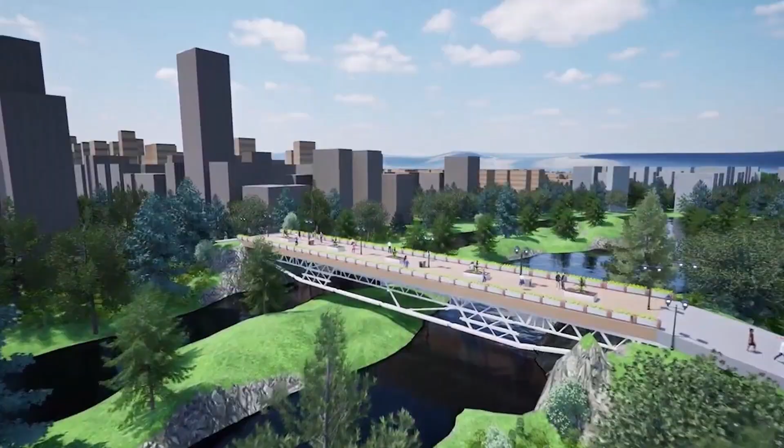To strengthen the integration of the population with the natural world, a steel bridge is proposed to be built spanning the Red River to connect the trails between the Forks and St. Boniface areas. Steel is chosen as the primary material due to its strength, stability, versatility, and commitments to sustainable practices. Furthermore, an aesthetically pleasing bridge design would help preserve the natural and scenic beauty of the Forks and St.

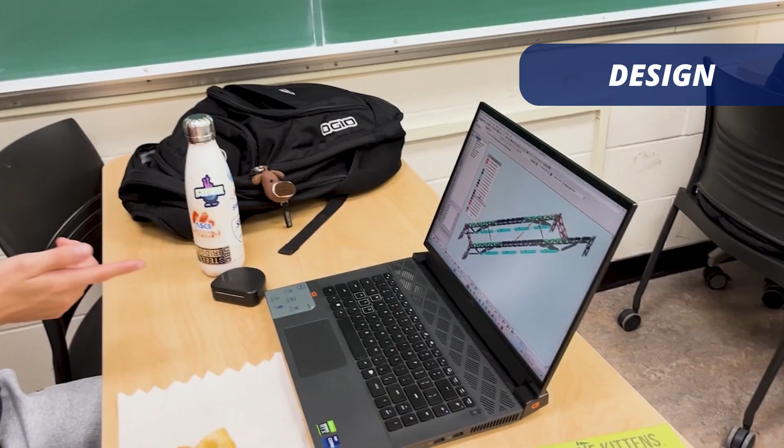Boniface trails. We developed a 1:10 scale model bridge consisting of 38 members and weighing approximately 190 pounds, with an aggregate deflection of 1 inch under a 2,500 pound dead load. Our design embodies efficiency and sustainability through minimizing material usage and optimizing constructability. Through Altair Inspire, we iterated under-truss and over-truss topology models that optimize material usage and placement. Ultimately, an under-truss design was identified to be more constructible and economically feasible.

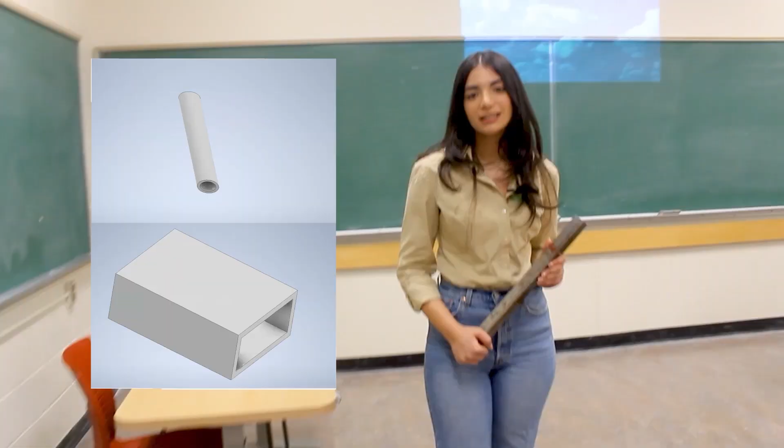Due to the piers being asymmetric this year, the optimal model that we selected involves strong lateral members and a wide bottom chord plate that we implemented in our final design. HSS and tube sections were selected as our members due to their ideal lightness to capacity ratio. S-Frame is used to design and iterate a virtual bridge frame.

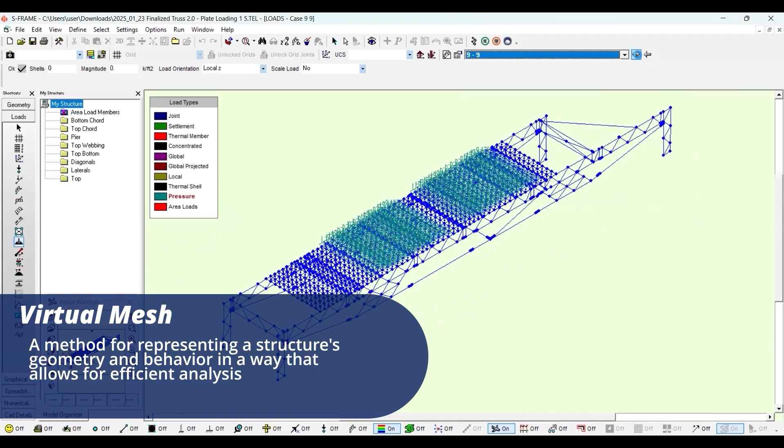Regularly, loads are split and distributed equally across both spans. However, due to the asymmetric requirements, we simulated plate loading using a virtual mesh. This approach accurately distributed loads based on the differing stiffness of the spans. Accurate analysis allowed us to optimize material use in the shorter span, reducing weight and enhancing sustainability.

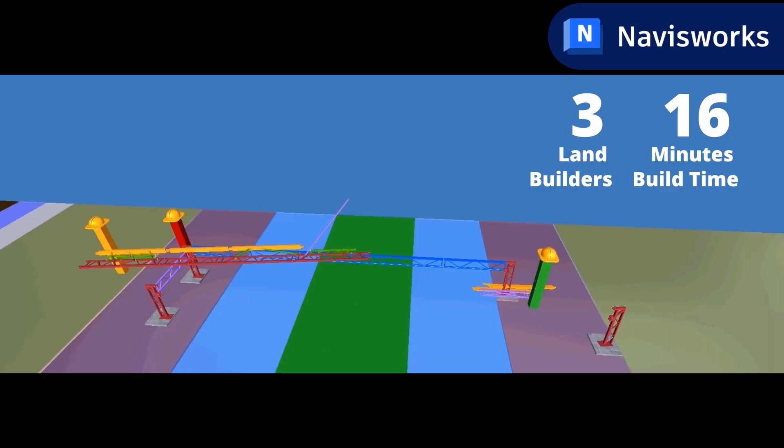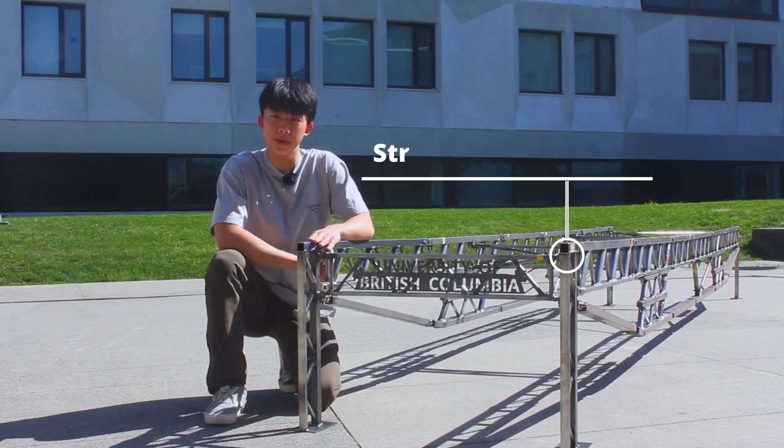This year, with the establishment of the construction subteam, constructability was a major focus in the design of our bridge. Through practice, our construction leads discovered that removing barges will be an effective way to improve construction economy. After careful consideration, a three-builder bargeless layout was selected, with a construction time of 16 minutes. As a result, DNA's finalized design included features that will benefit our builders during the construction phase. For instance, we strengthened our piers to function as a workbench during timed construction. This feature allows for bridge support while our builders assemble other parts of the bridge together.

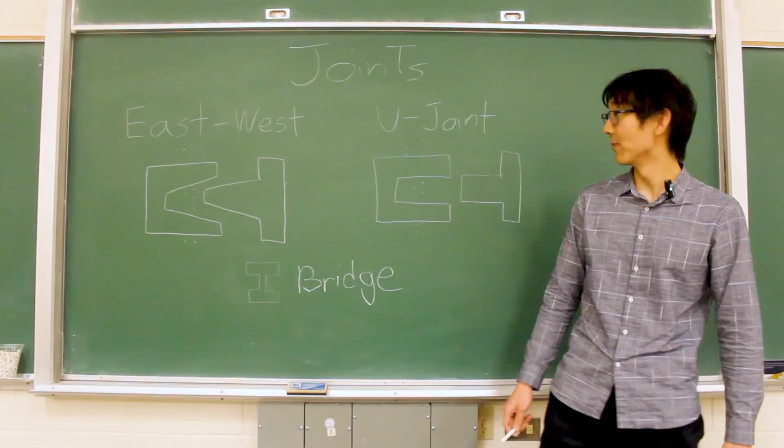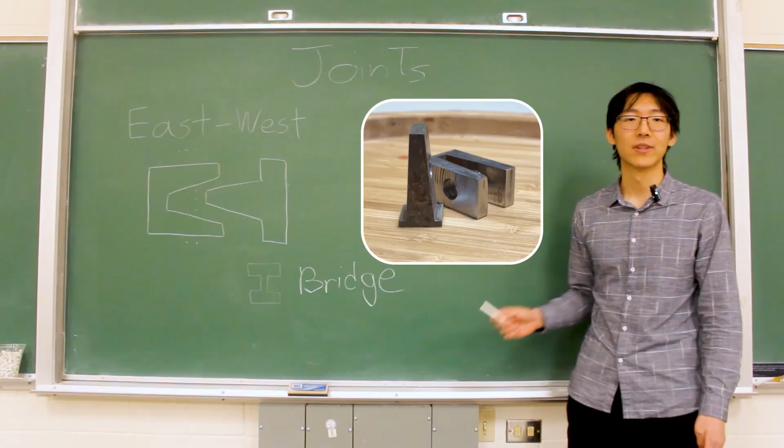Our connection designs balance strength and constructability by using 4 primary joint types. The east-west joints are used for connections in compression. It features a taper at the teeth of the connection that provides rotational and bearing resistance. The U-joint is similar to the east-west joints, but it doesn't have the taper. This joint is used for tension members. The plate joints were used for our 2D diagonals in order to add frictional resistance. And finally, our L joints are light capacity joints used for lateral connections.

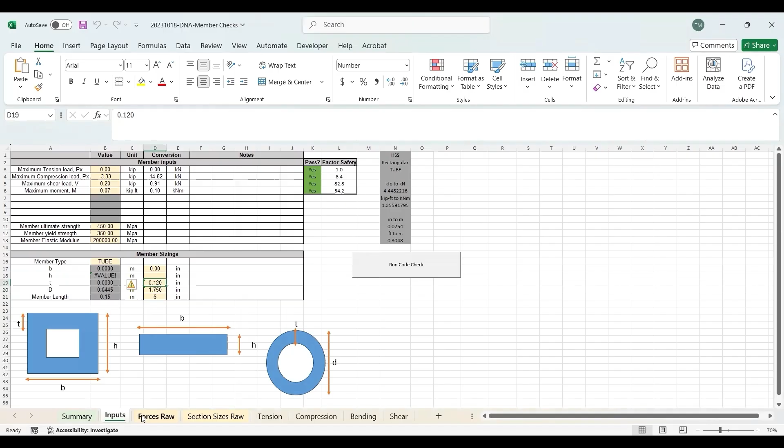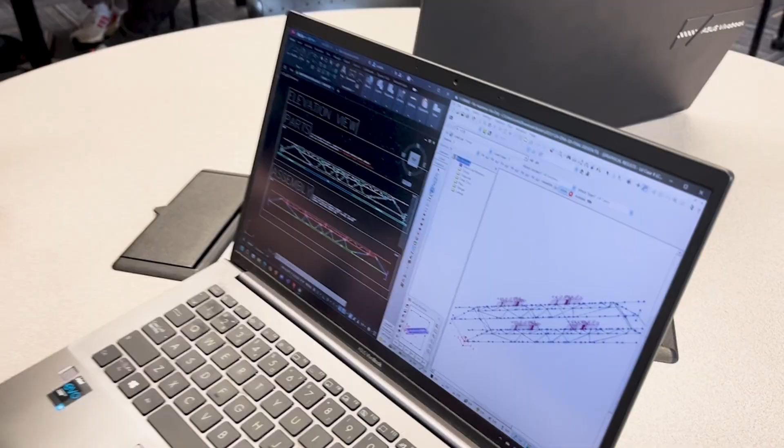Using Python, our DNA members developed an application that outputs the ideal joint sizing for every connection. This code expedited the calculation processes, allowing for more possibilities to be considered. Additionally, an Excel macro script matched section sizes to individual members and provided a corresponding capacity to demand ratio. Using these results, the S-Frame model is iterated and refined to optimize stiffness. Finally, spot checks are run with hand calculations to verify accuracy and ensure compliance with design standards.

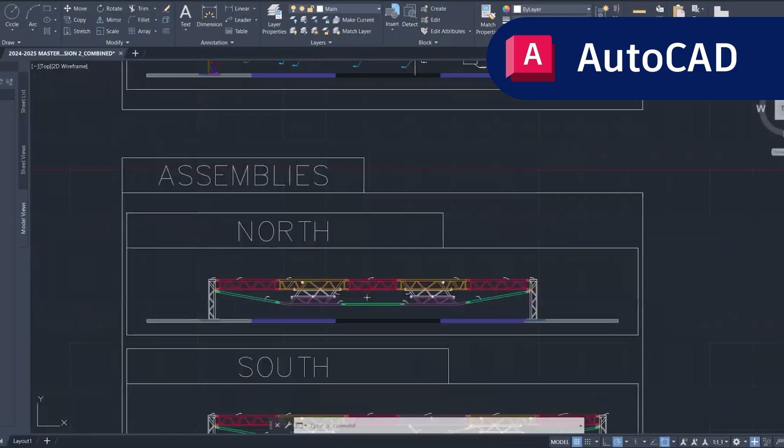The drafting subteam acts as a liaison between the DNA subteam's design vision as well as the fabrication subteam's finished product. And because of this year's design complexities, clear communication was the key to our success. After obtaining the finalized S-Frame model, the drafting team designed detailed drawings through AutoCAD, resulting in a full bridge assembly drawing. A 1-to-1 3D bridge model was then drafted using Autodesk Inventor.

Separate parts and assemblies packages were then prepared from the 3D model to assist the fabrication subteam in the bridge assembly process. The finalized drafting package is then submitted to our fabrication sponsors, who supply our steel parts. This process allows the team to precisely place individual members in the jigs for each assembly, which is then handed off to the fabricators to weld the parts in place.

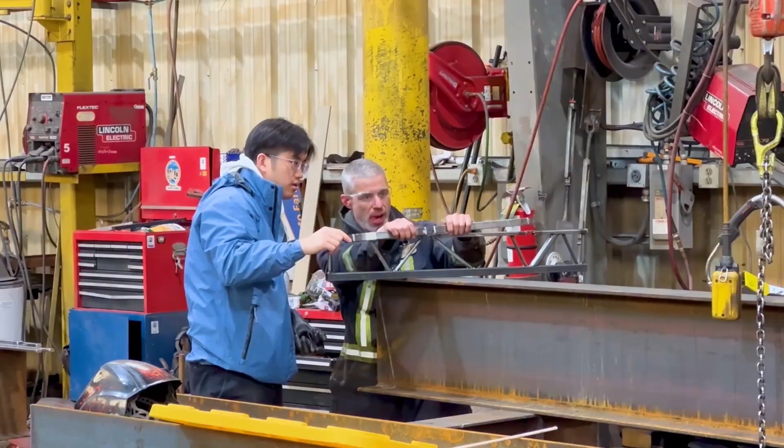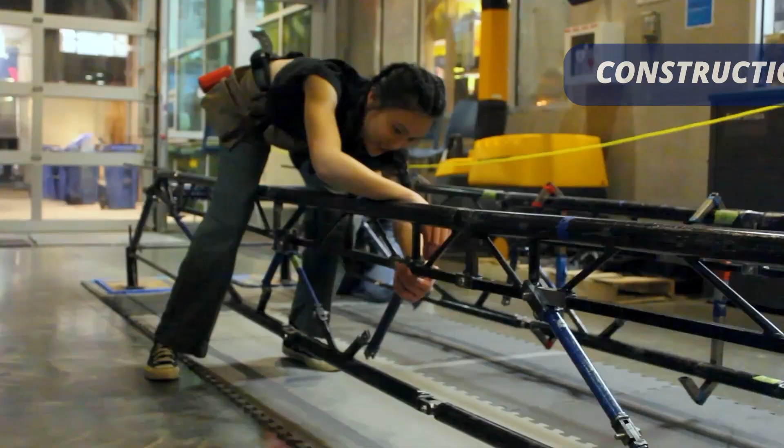The construction sub-team hosted weekly construction practices to familiarize members from all sub-teams with timed construction rules, constructability concepts, and the use of tools. For design members, this experience provided valuable insight for brainstorming innovations for optimizing construction efficiency. Consistent practice also helped members get to know each other as the year went by and helped build a strong sense of camaraderie and community.

UBC Steel Bridge thrives on innovation, collaboration, and dedication. Our team achievements reflect the hard work and perseverance of our team, who embrace late nights and countless revisions to bring our vision to life. Now, more than ever, we need to build bridges, not just in structure, but in community and resilience.